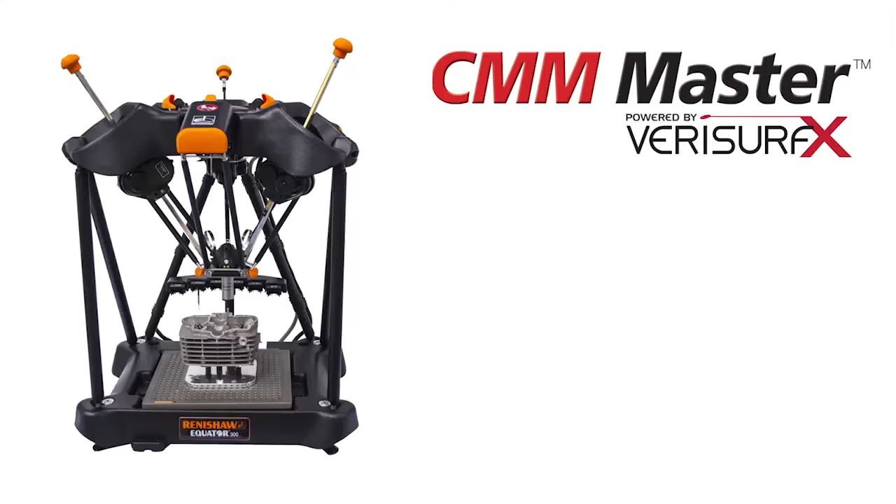In this video, I'll show you how to use the CMM Master with Verisurf Metrology software to automate part inspection on the shop floor in order to reduce scrap and increase productivity. You'll see how to create inspection plans using Verisurf Automate and then run them in AutoInspect. You'll also see how to create plans using Teach Mode and how to use the CMM Master as a comparator.

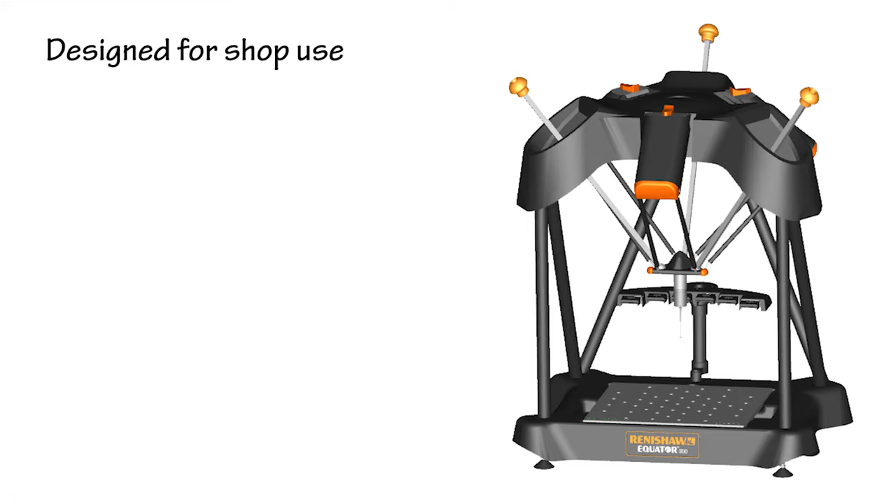The system is based on the proven Renishaw equator and enhanced using Verisurf's cubic volumetric mapping. The result is an accurate CMM that provides fast, affordable in-process inspection. The CMM Master is designed for use in a shop environment. It draws less than 200 watts, doesn't require an air supply, and operates over a wide temperature range. The machine weighs only 55 pounds and is roughly a 2-foot cube, so it's very portable.

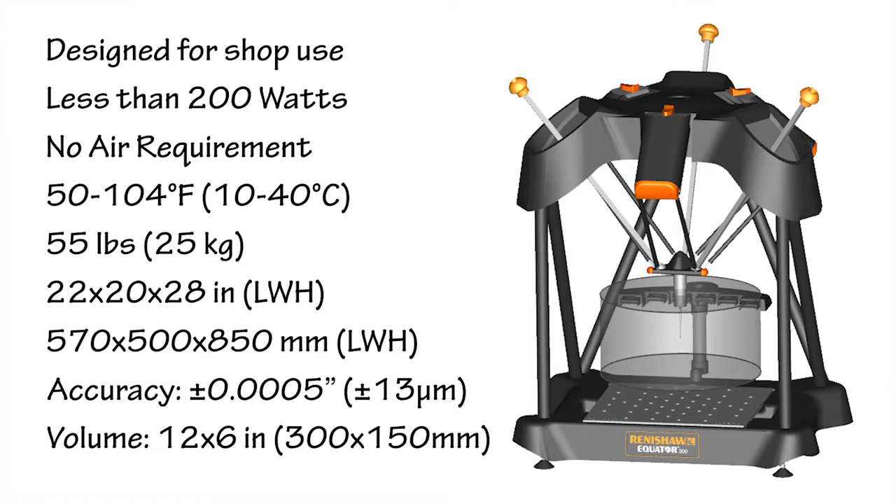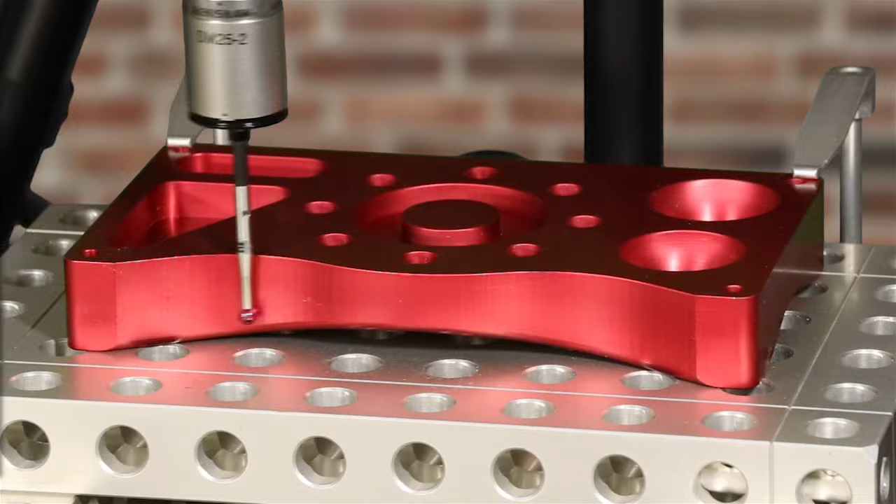The volumetric accuracy is plus or minus 5/10,000ths of an inch, and the working volume is a cylinder with a 12-inch diameter and a 6-inch height. In addition, an extended height model is available for measuring taller parts. It supports the Renishaw 3-axis SP25 scanning probe kit and scans at a rate of 1,000 points per second. In addition, each CMM includes a certificate of calibration and a 12-month warranty.

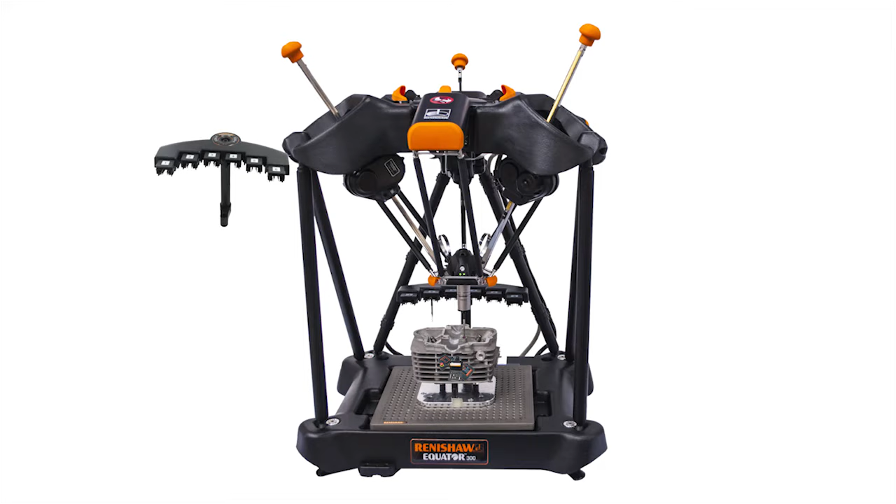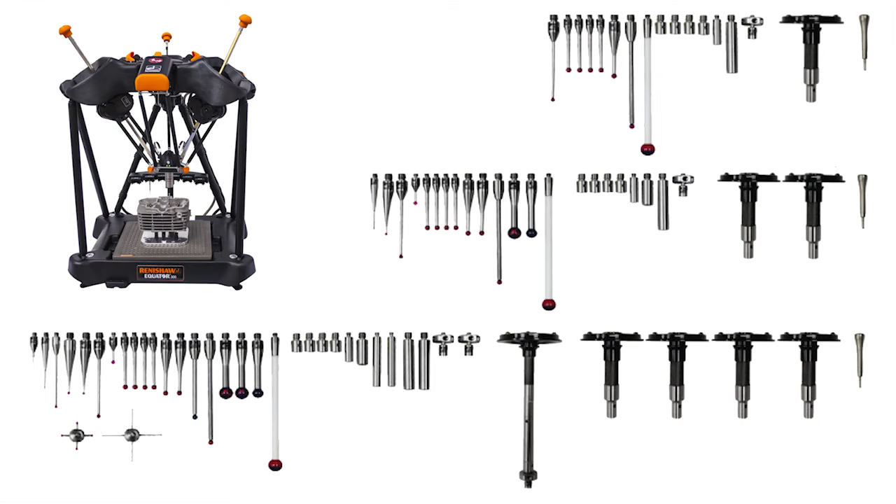Finally, the CMM Master is supported by a wide variety of standard and optional probe and fixture accessories. Standard accessories include a 6-position probe rack, fixture plate, joystick, SP25 probe, and cleaning kit. Optional accessories include basic, intermediate, and advanced kits with 15, 22, and 33 probes respectively. 2 enclosure options are available, and the fixture accessories include plates and modular kits that provide maximum flexibility for mounting parts.

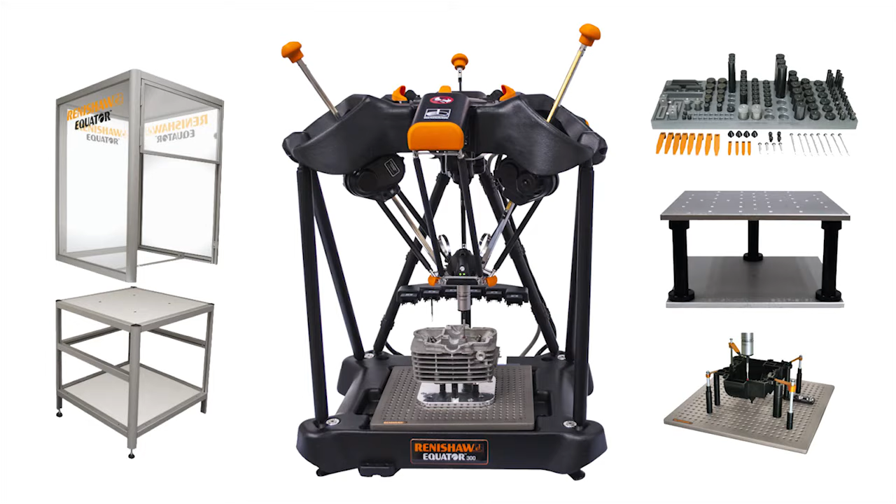We've seen an overview of the hardware. Next, we'll see how Verisurf supports open standards and modular software. Verisurf is committed to open standards that simplify manufacturing measurement solutions by providing our customers the freedom to choose the hardware that's right for them. Open Device Connection allows Verisurf to drive virtually all portable measuring devices, including portable arms, laser trackers, scanners, and fixed CMMs, making Verisurf a common metrology platform.

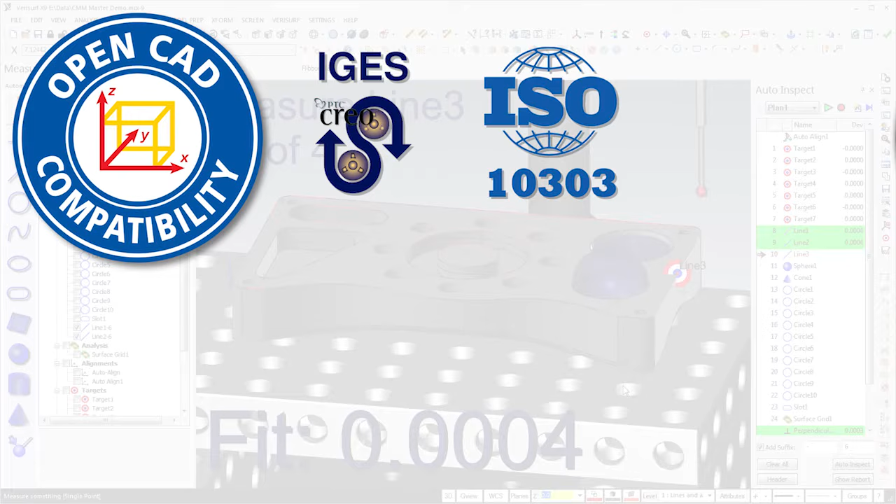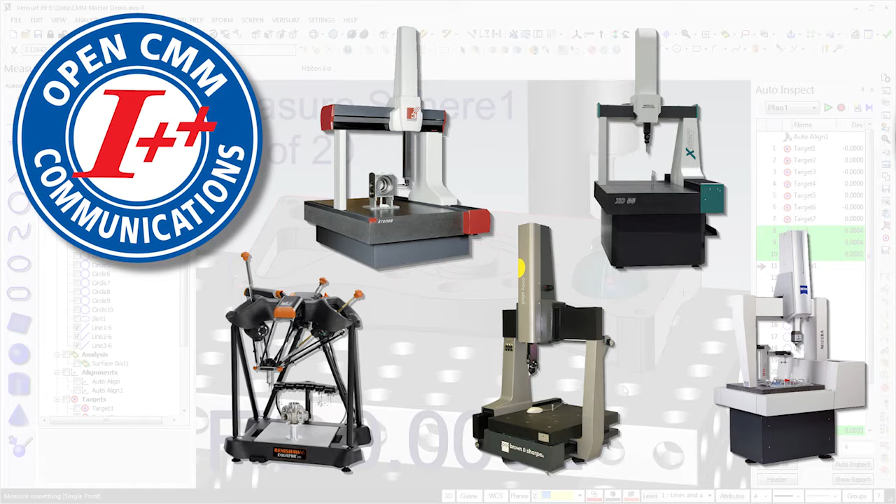Open CAD compatibility ensures that Verisurf will work with all popular CAD formats, including IGES, STEP, Pro-E, SolidWorks, NX, CATIA, and numerous others. Open CMM Communications extends our open standard support to all CMMs committed to the I++ DME protocol. Finally, the Open CMM curriculum from Verisurf University delivers online learning, customized on-site training, and lab and classroom support for educational institutions.

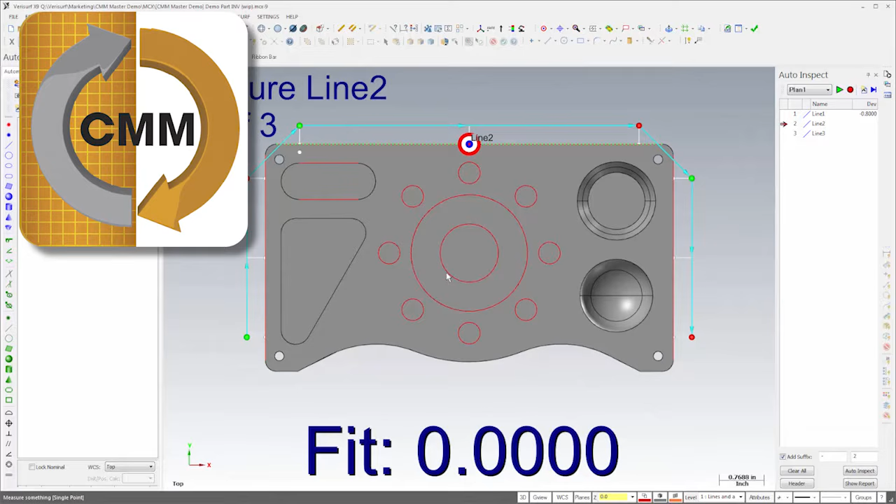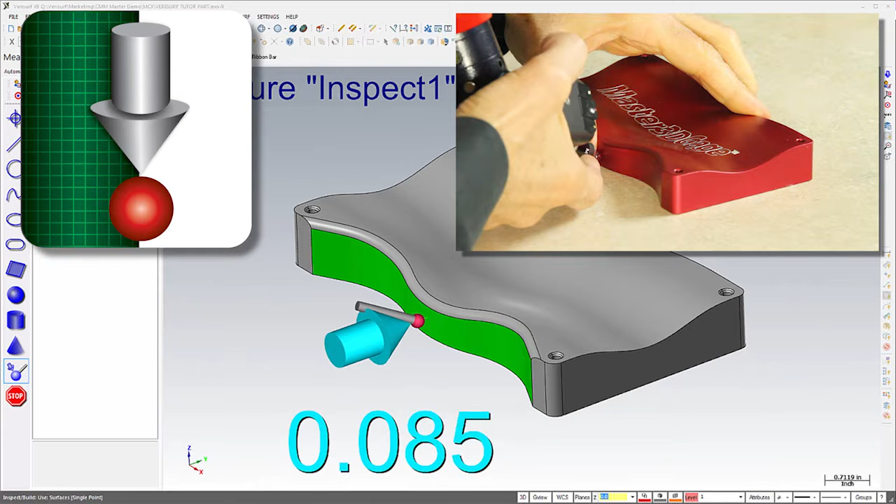Verisurf's modular software design allows you to select the functionality that's right for your application and budget. We've already seen how Automate enables CMM programming and operation. Verisurf CAD implements OpenCAD compatibility and is the foundation for all other modules. The Measure module enables inspection and reporting of prismatic features, and Analysis performs point cloud to model, best fitting, and comparison. The Build and Project modules enable guided positioning of objects to their nominal orientation, and Reverse creates mesh, surface, and solid models from point clouds. Finally, Validate helps to ensure that your nominal data matches the digital authority.

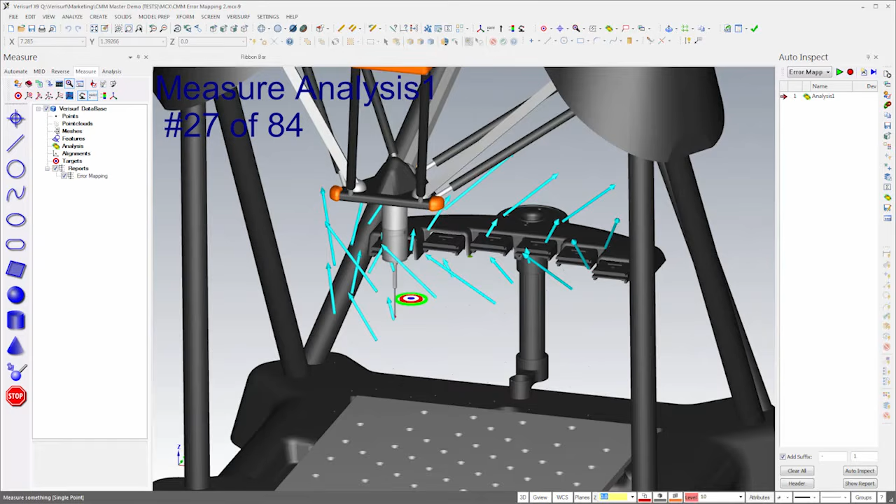We've seen the benefits of open standards and modular software. Next, we'll see how cubic volumetric mapping improves the accuracy of the CMM Master. The feature that differentiates the CMM Master from a standard Renishaw equator is the application of Verisurf's cubic volumetric mapping. Verisurf starts by using a laser interferometer to map the position errors throughout the equator's measuring volume. We then apply a 24-parameter correction model to compensate part measurements in real time. The result is a CMM that's not only repeatable, it's accurate as well.

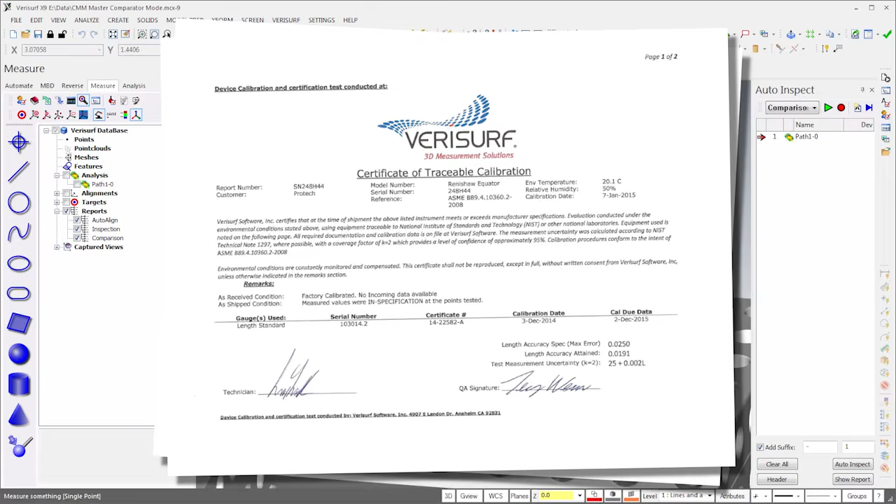Every CMM Master comes with a calibration certificate, and because the cubic volumetric mapping is done through software, the manufacturer's warranty remains valid. If you already own an equator and would like to take advantage of cubic volumetric mapping for increased inspection accuracy, Verisurf will error map your machine for a minimal fee.

The CMM Master is powered by Verisurf Automate, a graphical object-oriented programming language that works inside Verisurf's 3D CAD environment. The intuitive interface allows even novice users to program part inspections. I'll start by loading a model of the part that we want to inspect. Then I'll hide the device and zoom in for a better view.

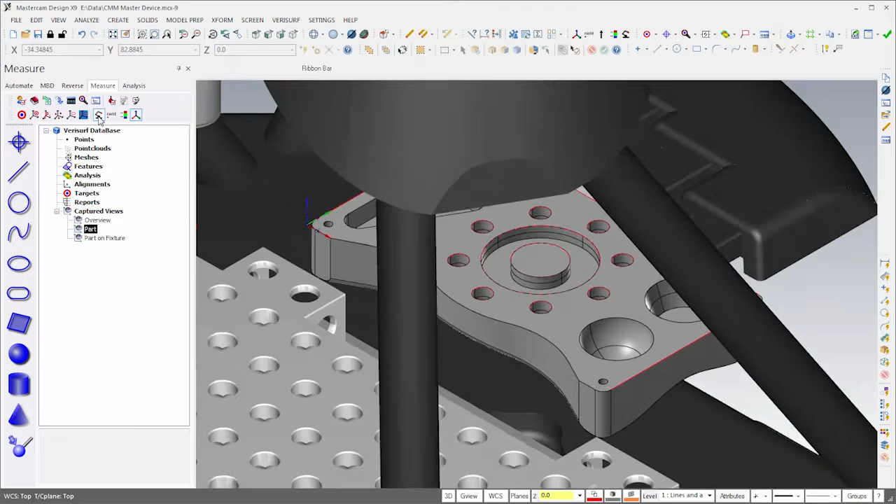For this example, I'll create a simple inspection plan to measure and analyze the hole pattern, the slot, the sphere, and the cone, and I'll measure the edge lines to check parallelism and perpendicularity. I'll also inspect surface profile on the front of the part. It's a simple plan, but it demonstrates many of the features of model-based programming.

To begin, I'll select the Automate tab and create a new plan. Next, I'll add circles for the hole pattern, the large ID hole, and the boss by selecting the features in the model that define their nominal values. We can see these values in the grid view as we highlight each circle. I'll continue by adding the slot, the sphere, and the cone using the same method.

Finally, I'll add the 3 lines on the top edges. Once the features have been added to the plan, we generate a drive path for them. I'll highlight circles 1 through 8 and choose Generate Path.

In the Generate Path dialog, I'll configure the path to measure 8 points on the inside of the holes at a depth of 1/10 of an inch.

On the CMM Settings tab, I'll use the top WCS to control the entry and exit vectors and set their distance to 1/2 inch. The WCS is a powerful programming tool that allows us to align the entry and exit vectors to a reference plane if necessary.

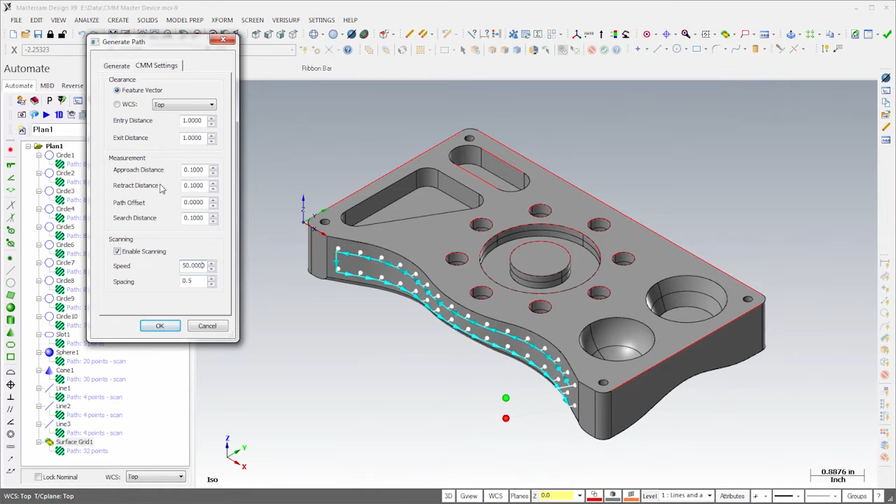The plan is now essentially complete, so we can run the simulator and observe the path. The simulation controls allow us to start, stop, and vary the playback speed. We can also highlight a single feature and simply drag the slider for greater control.

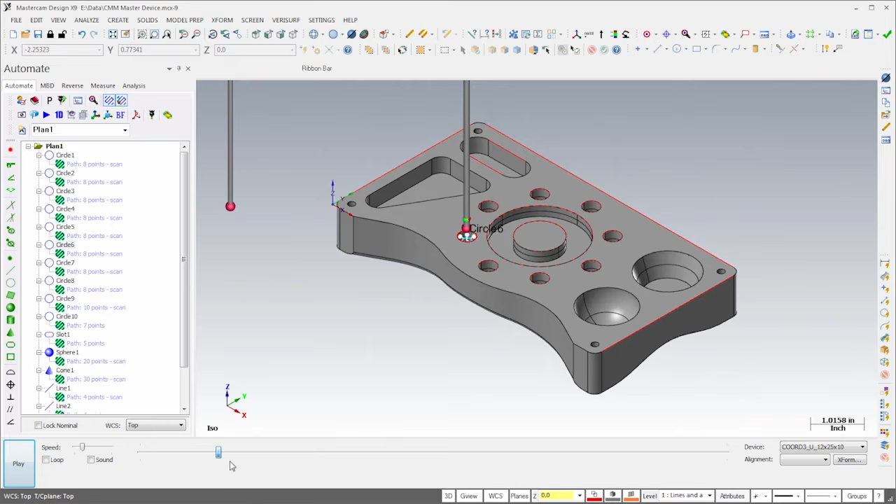Features can be positioned anywhere in a plan using drag and drop or cut and paste. Notice that I can improve the efficiency simply by moving the lines to the top, followed by the sphere and the cone. I'll do this by highlighting and then dragging the groups of features.

The purpose of the inspection is to report results, so I'll complete the plan by adding callouts to report parallelism and perpendicularity between the lines.

I'll highlight lines 1 and 2 and choose perpendicularity, and then do the same for lines 2 and 3. I'll then highlight lines 1 and 3 and choose parallelism.

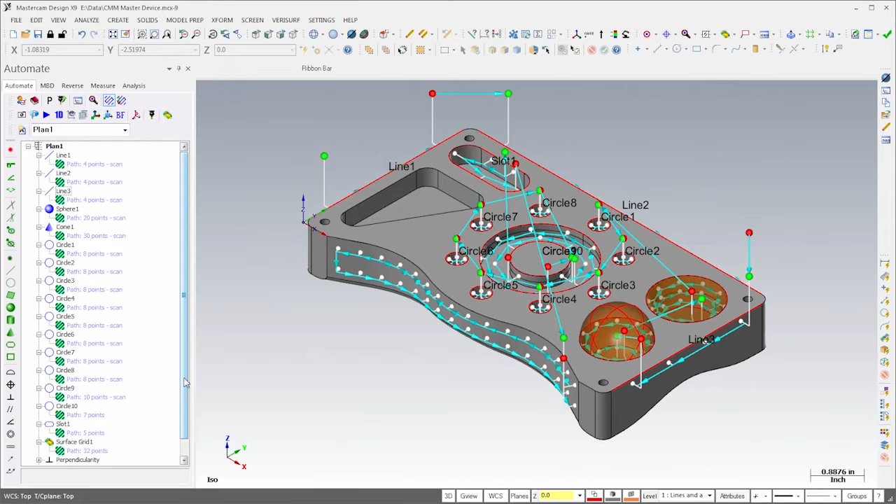I'll also construct a circle through the hole pattern. I'll highlight circles 1 through 8 and then choose Construct Circle.

In the Details pane, I can use the checkboxes to select the diameter, angle and spacing for the report.

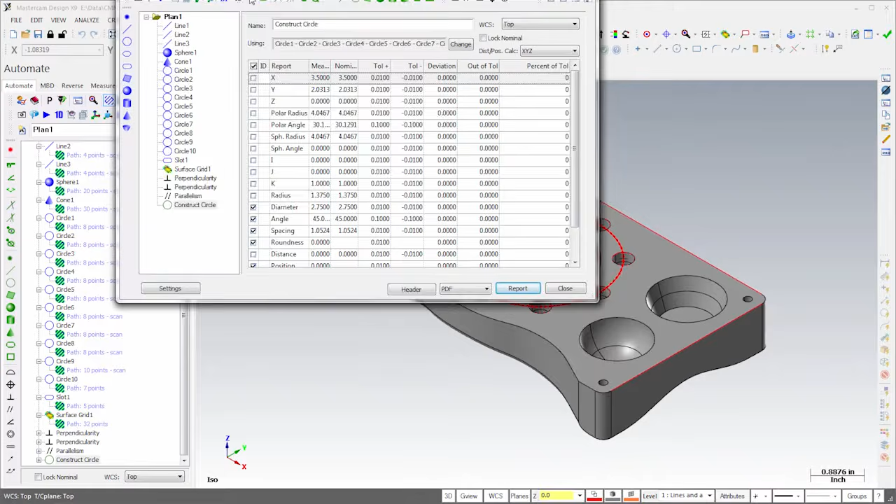I'll use the Report button on the toolbar to open the plan in the Report Manager, where we can see the features and calculations with various properties selected for reporting.

Next, I'll clear the report and then select the PDF format for file output.

Before saving the file, notice that I can restrict access to Automate and the Report Manager to prevent accidental or intentional modification of the inspection plan.

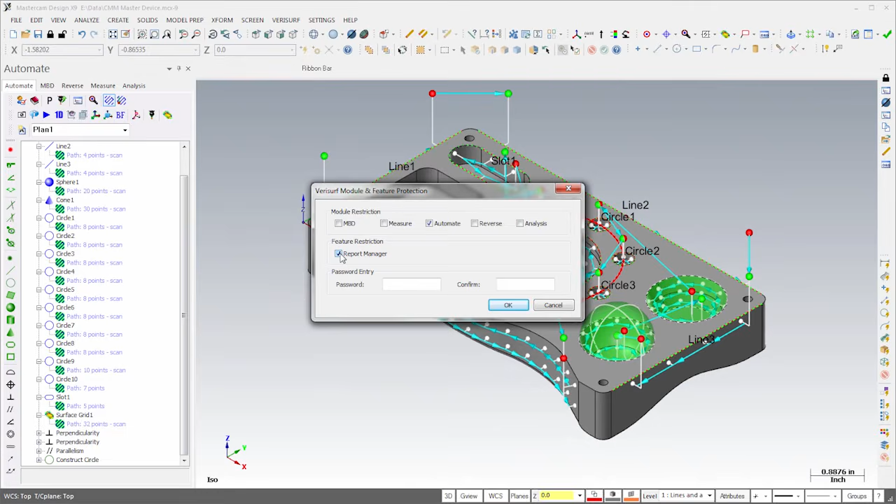The plan is now ready to run. In the following steps, we'll align the device and then inspect the part.

Before running the inspection, we need to align the CMM master to the part. I'll do this using AutoAlign since it's the easiest way to align using a CAD model.

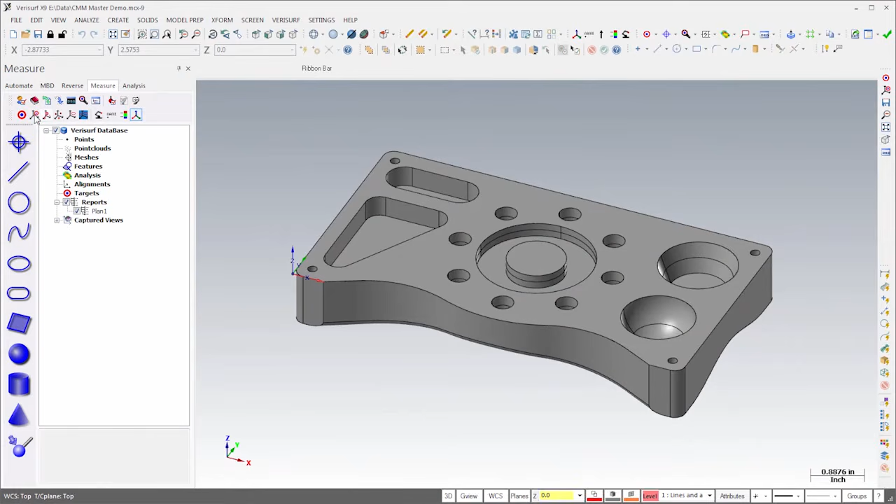In the Measure Manager, I'll choose Create Target and then click on the model to create the alignment target locations. Since the model includes datum targets, I'll place the alignment targets at the datum target locations.

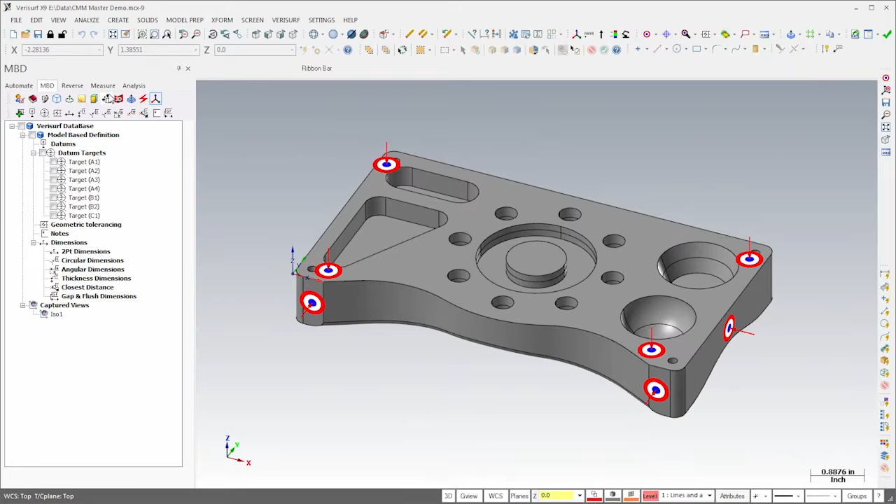When I'm done, I'll save the file and then choose Run Auto Align to begin the alignment.

As each target is highlighted, I'll use the joystick to drive to and then measure the alignment point. As we'll see later, the joystick can be used for manual measurements as well as teach-in mode.

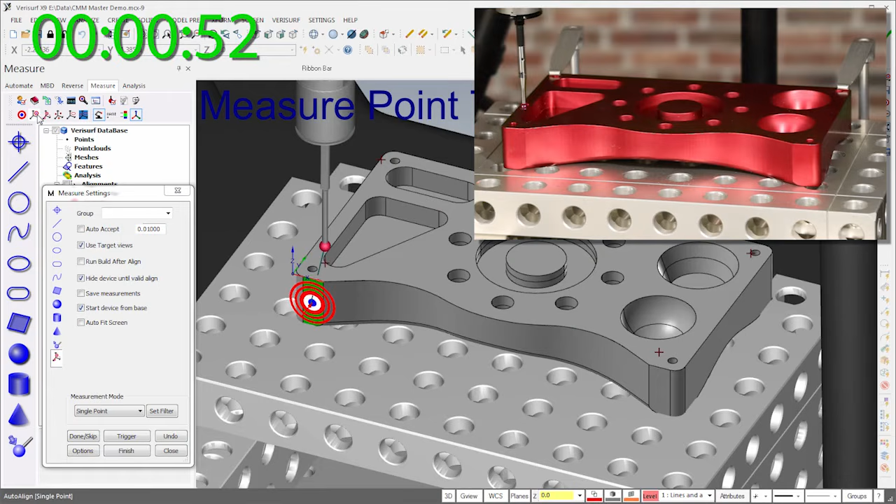When the final target is measured, Verisurf aligns the device using a best fit and then displays the results. Since the results look good, I'll choose to accept. The CMM master is now aligned to the part, so we're ready to run the inspection.

Inspections are run in Verisurf using AutoInspect. This interface can be used with a manual or automatic device to measure a part. It can also be used in offline mode to analyze existing data.

When I open AutoInspect, we see the list of features, the surface grid, and the calculations that make up the plan. I'll configure AutoInspect to display a report as soon as the inspection is complete.

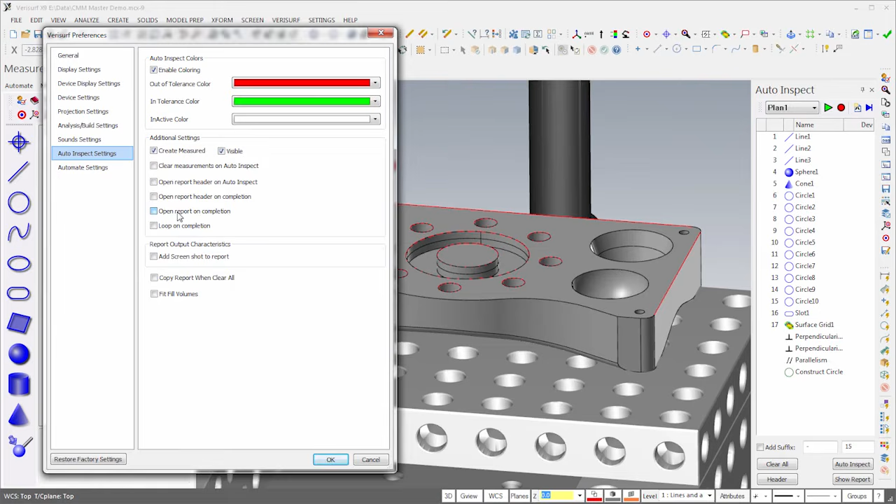Next, I'll choose Run and verify that the CMM is ready. As the plan executes, the maximum deviation of the selected properties for each feature is displayed. If all the selected properties for a feature are in tolerance, it's highlighted in green, otherwise it's shown in red.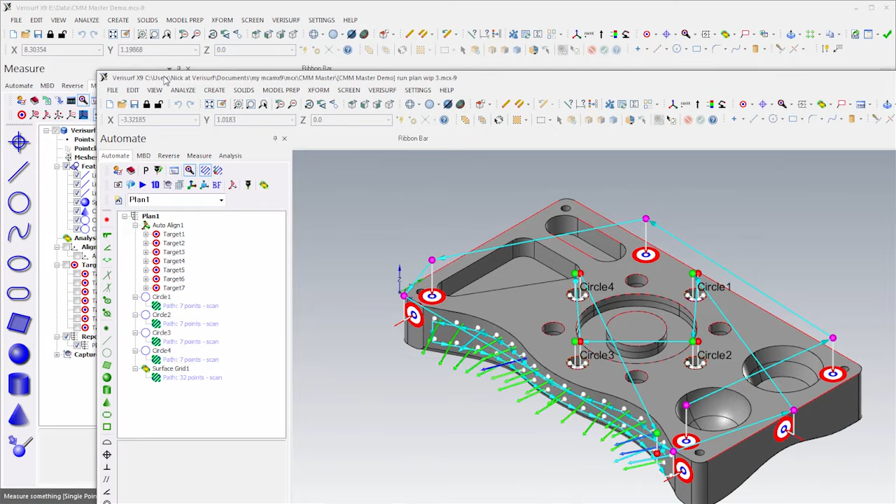Notice that while the inspection is running, I can switch to another instance of Verisurf to continue programming another inspection. This makes the system very efficient.

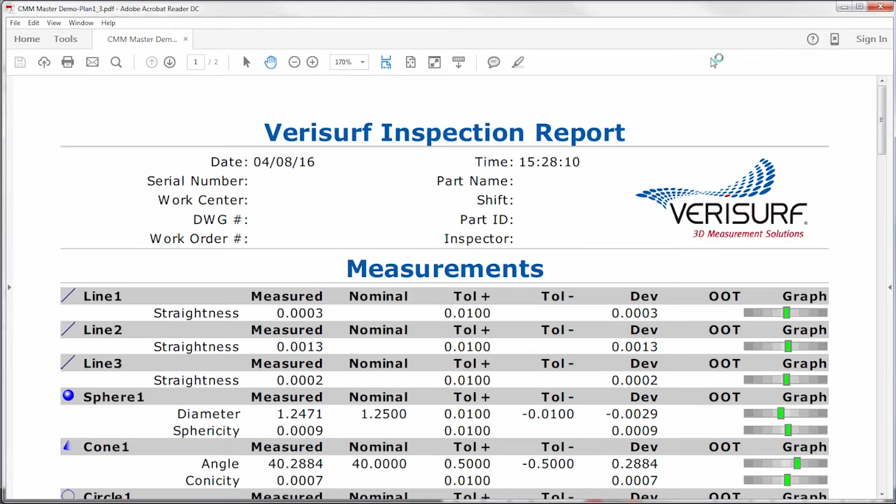When the inspection is complete, Verisurf opens the report to display the results. In it, we see the feature properties that we chose to report.

To demonstrate offline inspection, I'll clear the results and then export the analysis to a point cloud. When I choose Run Offline, Verisurf recalculates the results and displays the data from the initial inspection.

Next, I'll place another part in the fixture and rerun the inspection. Rather than align the part using the joystick, I'll add Auto Align to the inspection plan so we can run it automatically.

I'll highlight the targets and add them to the plan. In the Automate Manager, I'll move Auto Align to the top of the list. Notice how we see the change reflected instantly in the Auto Inspect dialog.

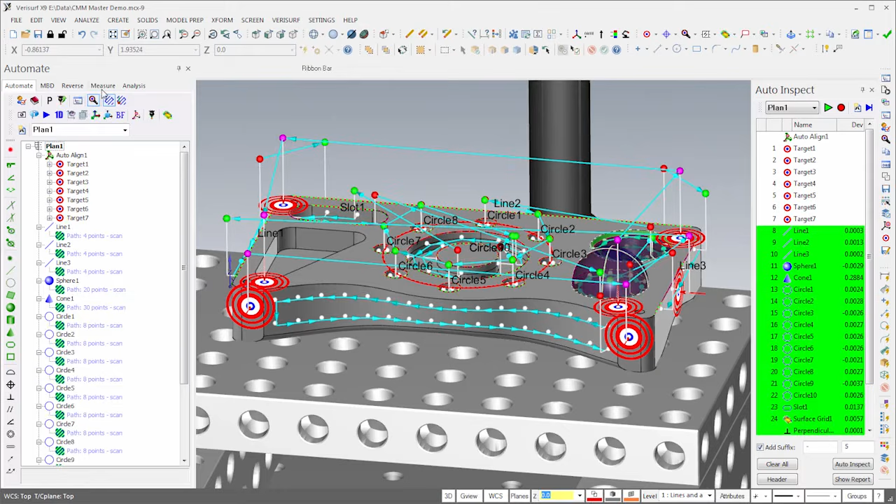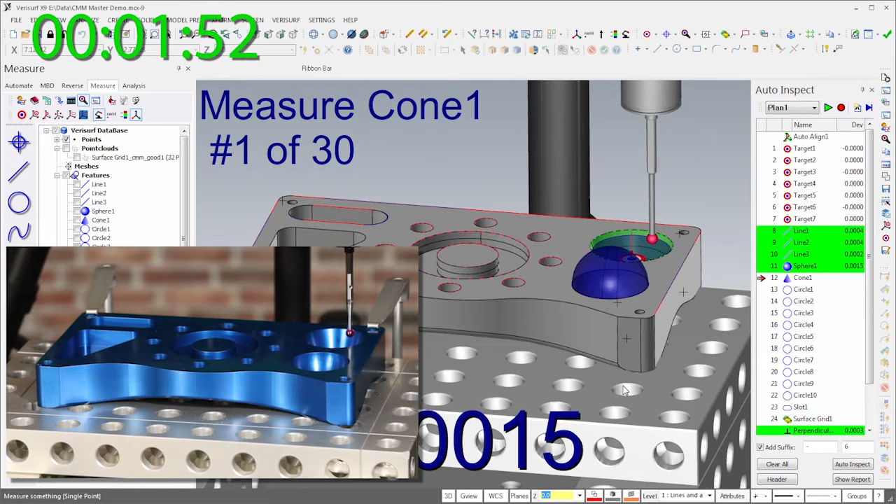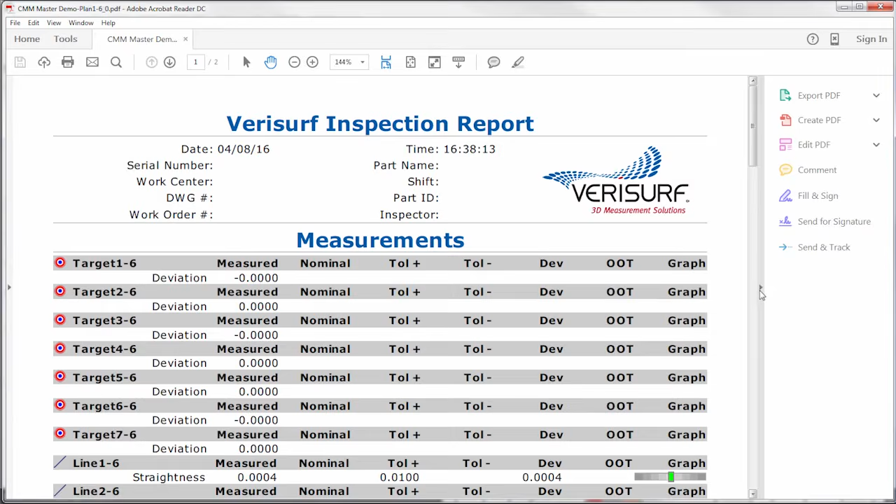I'll then clear and run the plan, which now begins with the alignment. When the plan is complete, Verisurf displays the inspection report.

We've now seen how to program an inspection and check multiple parts using automation. Next, we'll see how to measure in manual mode and how to use Teach mode to program an inspection.

In manual mode, we measure by using the joystick to drive the probe. As we'll see, this is another way to program an inspection. Although we're using a model for this example, manual measurement is also a convenient way to program an inspection in a print-based workflow.

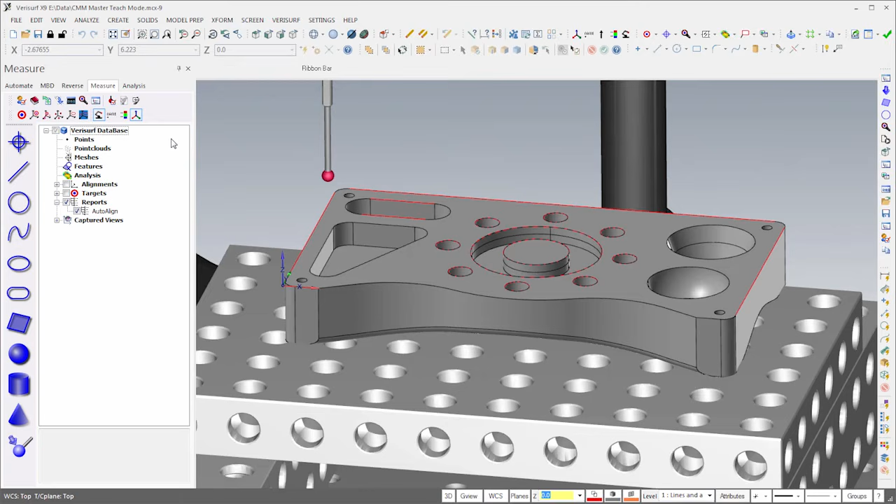I've opened a new file and aligned to the model, so I'm ready to begin measuring features, and I'll start by measuring a plane on the top of the part.

Next, I'll measure 4 of the holes in the pattern. I'll measure the 2 end planes so that we can check parallelism.

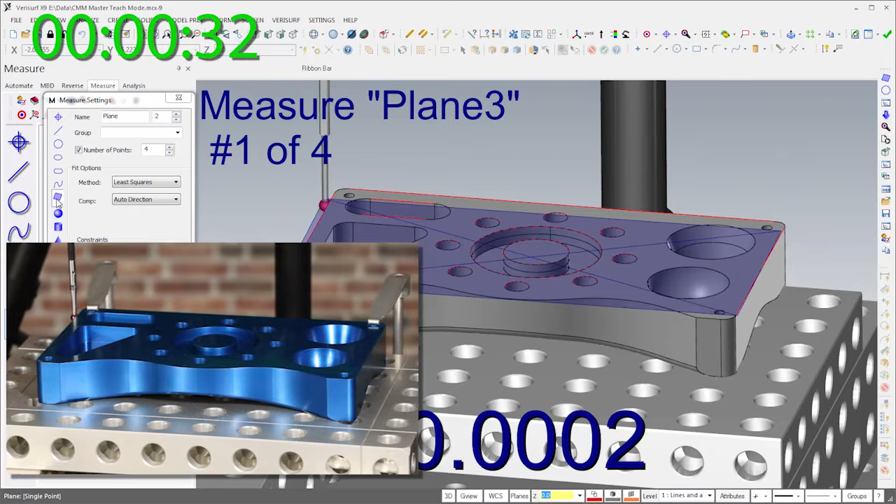Finally, I'll select Inspect Build Mode and check Profile at a few locations along the front of the part. When the measurements are complete, I'll create a report to analyze and display the results.

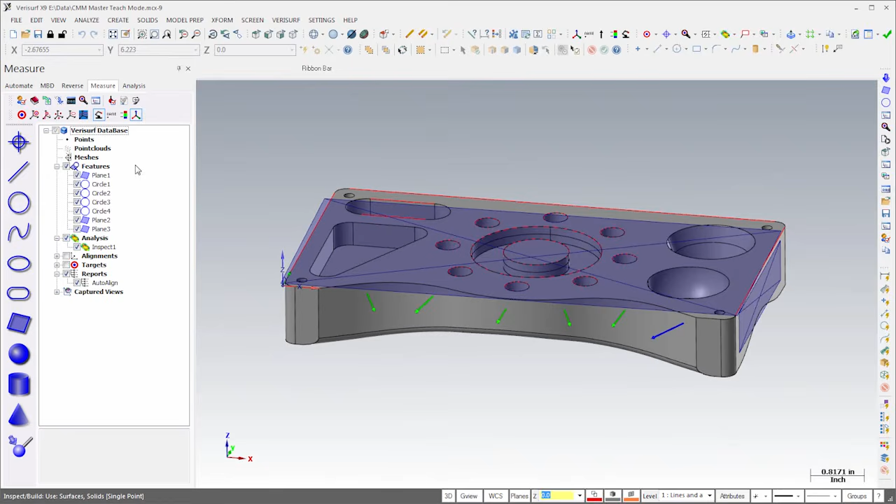When I do, Verisurf adds the report as a plan in the Automate Manager. In Verisurf, plans and reports are synonymous. When we create a plan, it also creates a report to analyze and display the results of the plan. And when we create a report, it also creates a plan to measure the features in the report.

In this respect, Teach mode in Verisurf is as simple as measuring a part and creating a report.

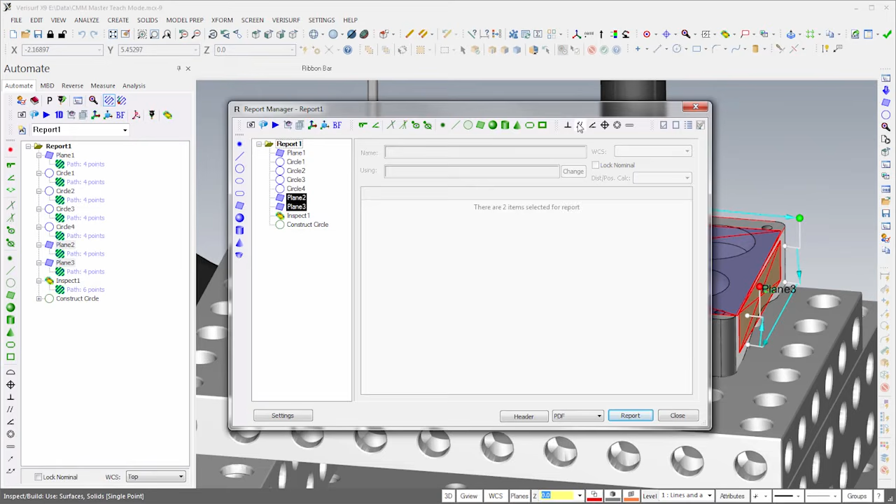With the Report Manager still open, I'll construct a circle through the hole pattern. I'll also create a parallelism callout between the 2 planes. Looking at the plan in Automate, we can see the calculations as I add them to the report.

In Auto Inspect, I'll clear the results and then run the plan. When the inspection is complete, Verisurf displays the report.

We've now seen how to automate an inspection using both Automate and Teach mode. Next, we'll see how to use the CMM Master as a comparator.

In our previous examples, we've analyzed measured features and surface profile to nominal values. In some cases, however, we want to compare a batch of parts to the initial measurements of a reference or golden part. We refer to this application as comparator mode.

To save time, I've loaded a model that has an alignment and a surface inspection programmed, and the part is already aligned. I'll start by measuring the golden part.

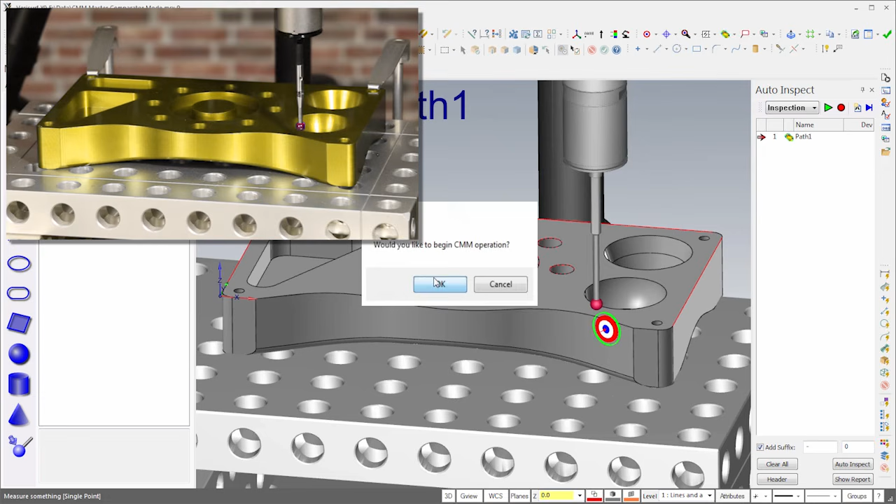When I run the plan called inspection, we'll see the deviations of the golden part from the nominal model. These are the deviations to which we'll compare subsequent parts.

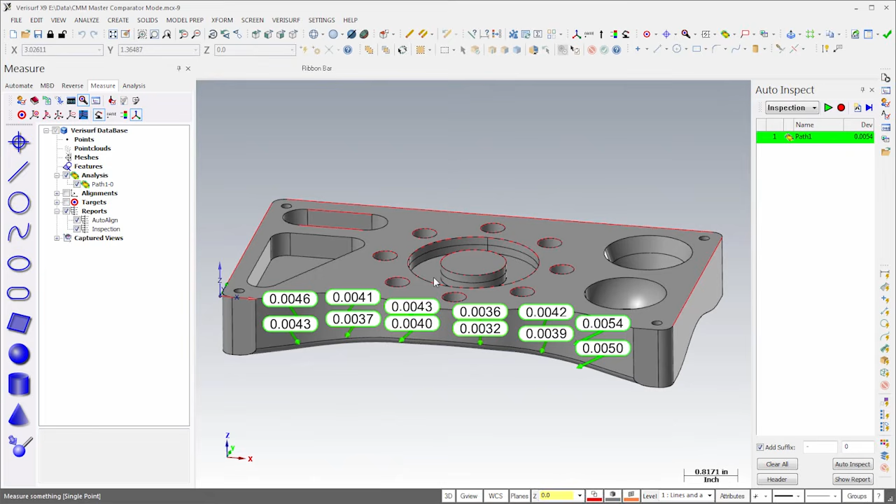If I were to rerun the inspection plan, we'd see the same deviations from nominal as the initial run. Instead, I'll create a new plan from the initial inspection and rename it Comparison. I'll then change the measure settings to show repeatability from the original measurements of the golden part.

If I clear and then run the plan called Comparison on the golden part, we'll see 0 deviations because we're comparing the golden part to itself.

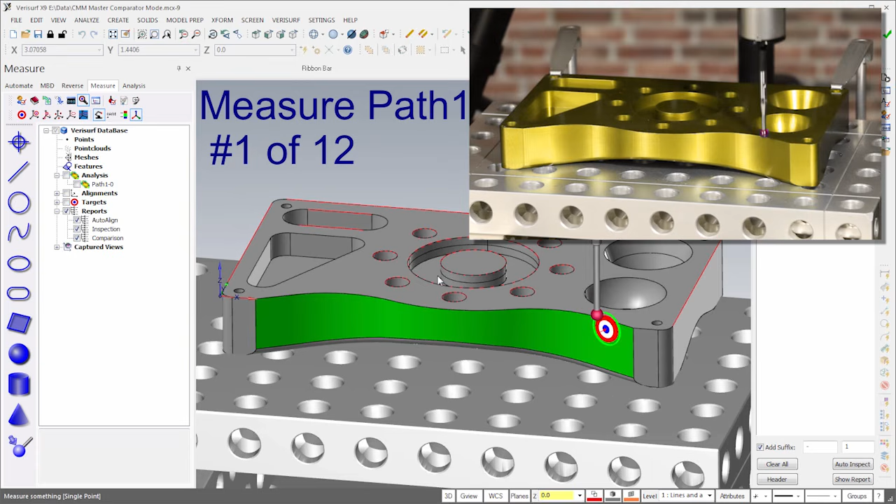I'll replace the golden part with a similar check part and then rerun the comparison. The check part is now fixtured, so I'll start by running auto align.

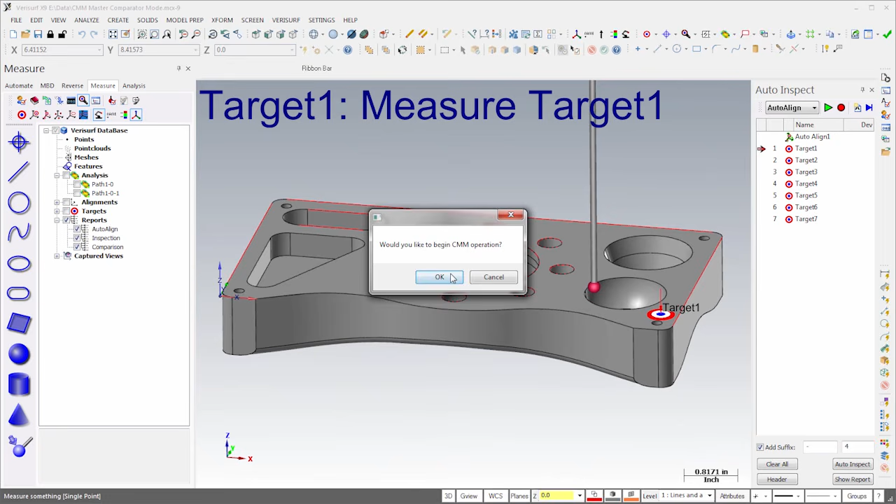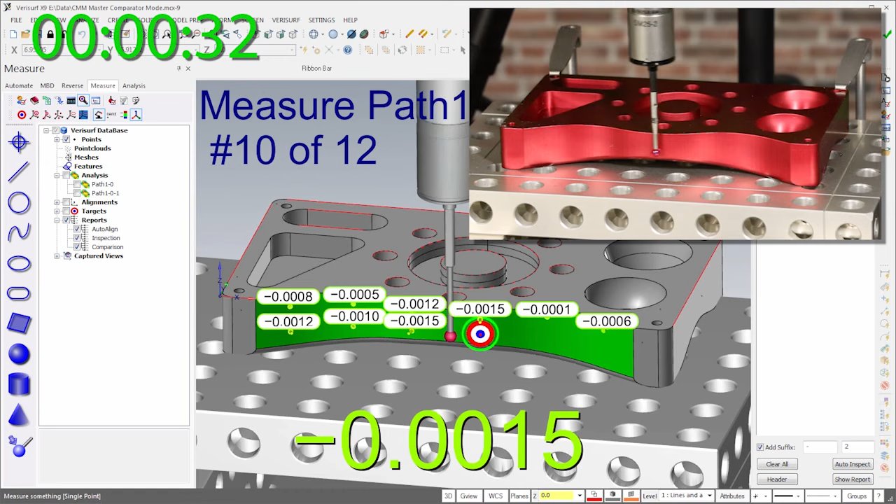When the alignment is complete, I'll clear and then run comparison on the check part. This time, we see deviations that represent a comparison of the check part to the golden part.

The use of the CMM Master as a comparator increases inspection flexibility by replacing single-purpose hard gauges. It simplifies inspection where measured rather than nominal data is the basis of comparison.

That concludes the presentation. I hope I've given you a good appreciation for how Verisurf and the CMM Master can help expand your inspection capabilities, increase inspection throughput, and reduce your overall QA costs.